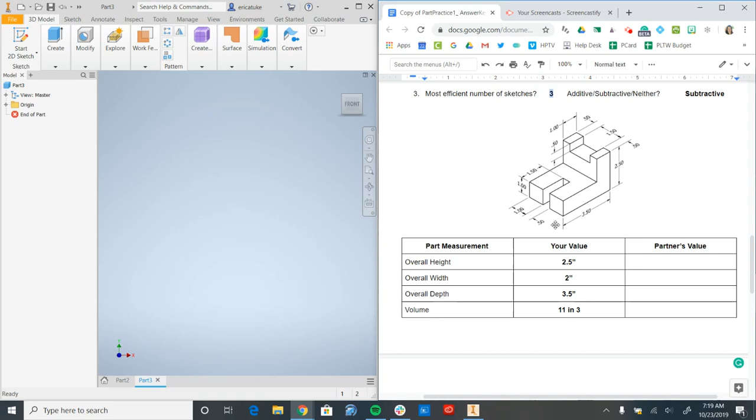So the overall height of my object is 2.5 inches. My overall width is 2 inches. And then my overall depth here is 3.5 inches. So if I start my 2D sketch on my XY plane, I'm going to use my line tool to start at my origin and trace out the general shape of that L.

You know what, I'm actually going to go the same way as the pictorial. So at this point, I'm not adding in any dimensions. I'm just making the rough shape. So once I go to my dimension tool, my overall height here is 2.5. This is going to get really big. My width in this case is 3.5. I'm going to have to zoom out to find that again.

This width here at the top of my L can be seen here. That's 1 inch. And I have this height here as also being 1 inch. So I don't need this segment because I already have my overall height here of 2.5. And since I have this 1 here, this dimension is already assumed. Again, if you're not sure if you have it all there, check down here to make sure that your part is fully constrained.

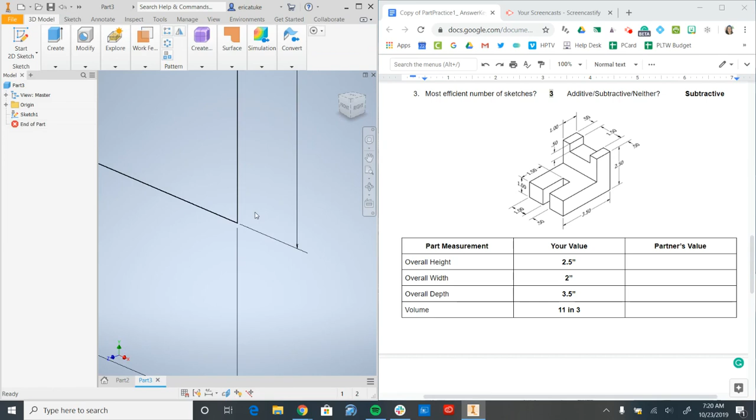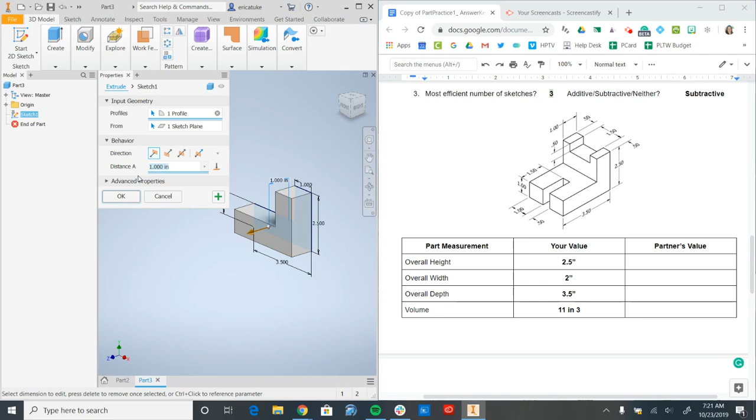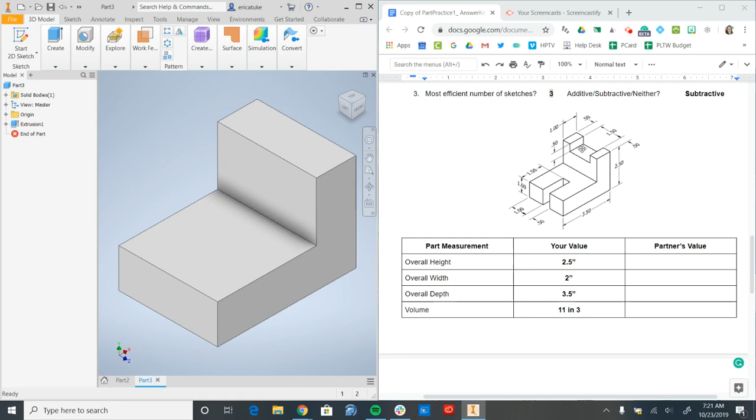Now, right now, we're looking at the back of my part. This is not the correct view that you want to be looking at it in. So you can use your view cube here to rotate to make sure that you're looking at the right face. The first section that I'm going to extrude is going to be this part up here. Again, there's a couple of different faces that you can extrude this from, either the top or the front or the back. I'm going to start a new 2D sketch on this front face and tackle it that way.

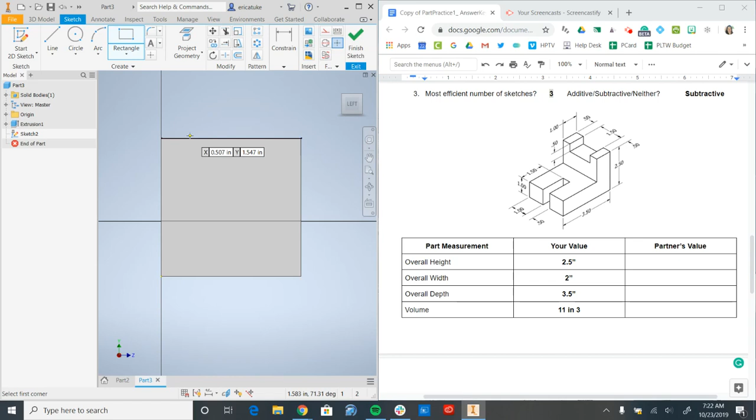So I'm going to use my rectangle tool. And it's really important at this point that I align my cursor, or this plus sign, right here at the top of my part, so this rectangle locks into place. I'm going to right click and say OK to finish that command. If I go to my dimension tool, I can dimension this width to be 1.5. And I know the height of this rectangle is also 0.5. Now, those are my two size dimensions for this rectangle.

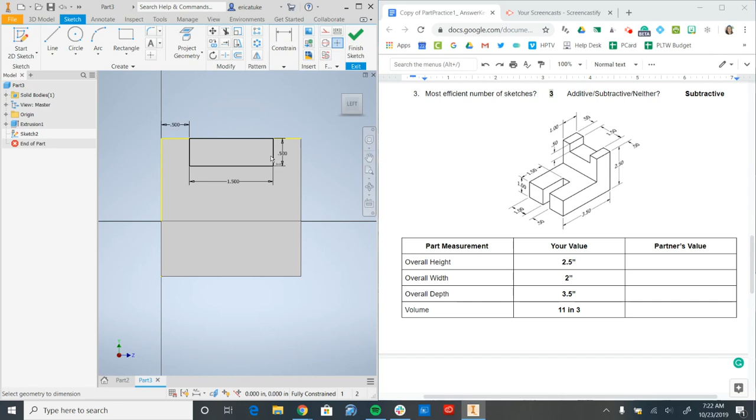But what I need to do next is I need to go in and do my location dimensions. So to do that, I'm going to click on this vertical side of my rectangle and click on the edge of the part and make sure that's dimensioned to 0.5 inches. And if I do the same thing on the other side, it's going to give me a driven dimension warning because that dimension is already assumed. So if I click on it and you get this error, go ahead and just say cancel.

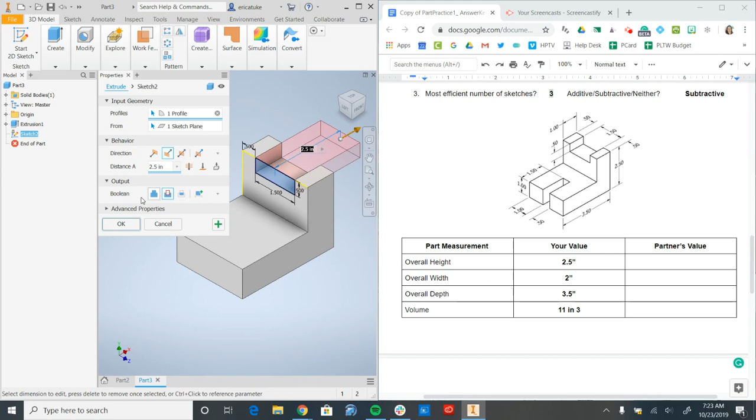So from here, I can right click and finish my 2D sketch, go to my extrude feature, select my profile, and make sure I flip the direction. So again, in this case, I don't necessarily need to specify a distance because it's going through the entire part. So I can go ahead and say OK and amend that extrusion.

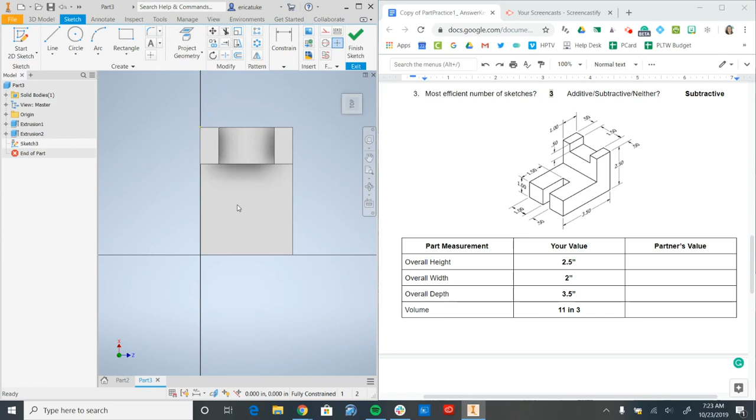So let's go ahead and do this final extrusion down here on this base piece. You can make the 2D sketch from this plane or this plane. I'm going to go ahead and make it on the top. And again, I'm going to use my rectangle tool and align my cursor with the edge of the part and draw out the general shape. Right click to say OK.

I'm going to go to my dimension button, and I can see here that my overall width of that part is 0.5 inches. So I can either click on either side of this part and say 0.5, or you can simply click on this segment here. Now you can see after I dimensioned that, it offset this quite a bit. So I want to go ahead and add in my location dimension of 1 inch. So we'll go to dimension, click on the edge of my part, click on the edge of the shape, type that in as 1 inch for my location dimension.

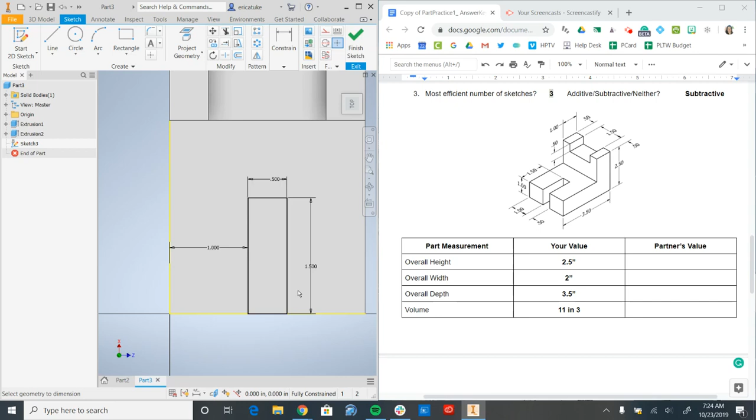And now I need to add just one more dimension right here, which is the length of this part, and make sure I have that in there as 1.5. So at this point, my object is fully constrained. I don't need to add any more dimensions. So I can right click and finish my 2D sketch, go to my extrude feature, change the direction of my extrusion to make sure it turns red and it's cutting through my object, and I can say OK.

To check the iProperties, you're going to right click on part 3, go down to iProperties, go over to Physical, click Update, and your volume is going to show as 11 cubic inches, which also checks out here in the answer key.